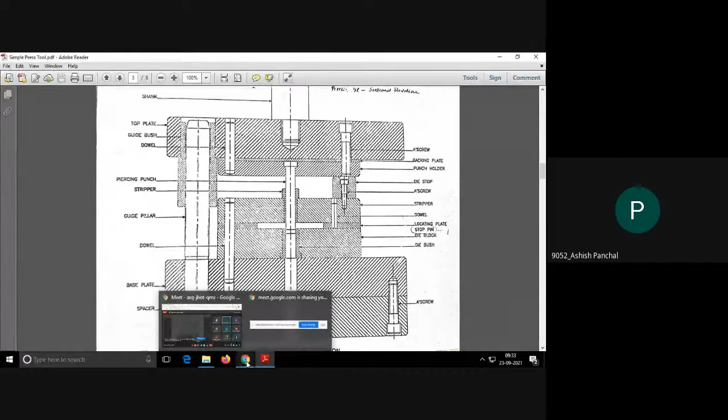Die block you take 25 mm thickness. Stripper you take 15 mm. Punch holder you can take 15 mm. This is just a rough guideline, okay, it's not hard and fast. And for the punch backing plate, 5 mm.

Then, coming to the bushes, how to design the bushes. You have to take minimum 3 mm and maximum 5 mm, not more than 5 mm, not less than 3 mm, because if the thickness of this bush is less than 3 mm, then it can collapse while fitting as well as during working. So minimum 3 mm wall thickness has to be there.

So for example, if piercing punch diameter is 10, then this diameter of the guide bush will be 16 minimum and maximum 20. Similarly, collar also you can take 3 mm to 5 mm. So if this is 10, this diameter maximum will be 20 and this diameter maximum will be 30. Then collar height thickness, you can have your own judgment. You can take 5 mm.

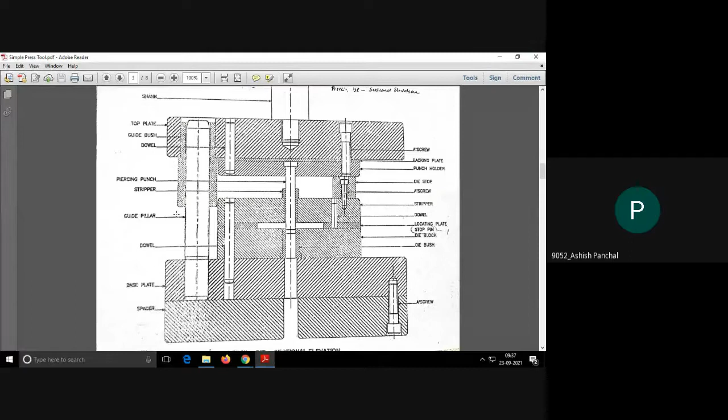Now this is a straight pillar, uniform diameter. You can have a collar here also for the guide pillar. That is a good design. Okay, so that collar you can keep. Now suppose if you take this as 16 mm, this collar you can take 5 mm plus 5 mm, so 10 mm more. Or if you are taking this as 20, then the collar can be taken as 30 mm, and the thickness of the collar can be taken as 5 mm.

Now similarly here also, this length I told you 30 mm, but you can keep even 5 mm, and you can tighten it with the help of the bolt. Now here this bush is not tightened or fixed to the top plate. So during working, maybe after 1000 or 10,000 strokes, there may be possibility that this bush will fall down. Even though it is tight fit, because the tool is working and the guide pillar is going in and out, this guide bush may fall down. So it is a good practice to provide at least two bolts.

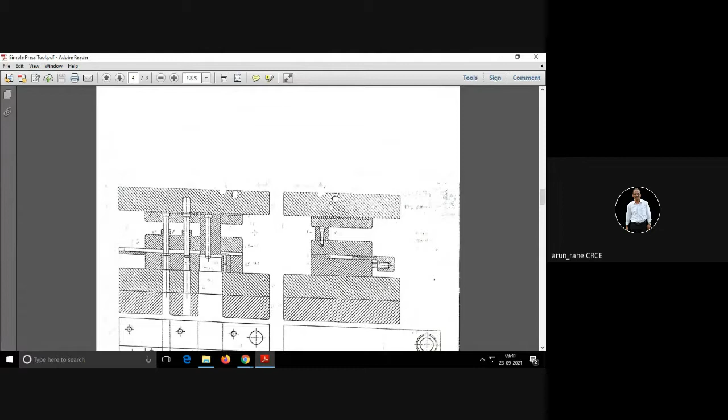Okay. Then another consideration here is this is a die stopper. Ye jo hai usko hum log die stopper bolte hain, or die stop. This is used just to prevent the falling of the upper half. Suppose in case it comes out of the shank, so if it falls down and, imagine, if this die stop is not there, then this punch holder will go and hit here and your punch holder plate will get damaged. So that's why we provide a die stop.

Now look, the die stop is fixed to the stripper plate. See the bolting. Die stops are round, circular. See here, these are the die stops. Ye jo dikh raha hai do, these are the die stops. Okay. So preferably the die stop should be at the center of the die, somewhere here, not at the end. Die stop should be preferably at the center or somewhere closer to the center.

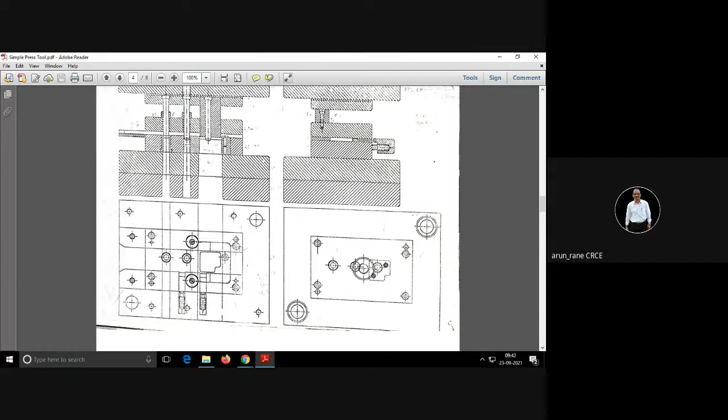So look here, the die stop is fixed to the stripper plate. So in case the upper half falls down, it will go and touch the die stop, so the damage will not happen. Die stop size: you can go for a round die stop of 25 diameter, and the height of the die stop can be taken as 20 mm. So ye die stop ho gaya. So I have told you die stop, shank, top plate, guide pillar, guide bush, dowel, everything. These are the basic parts.

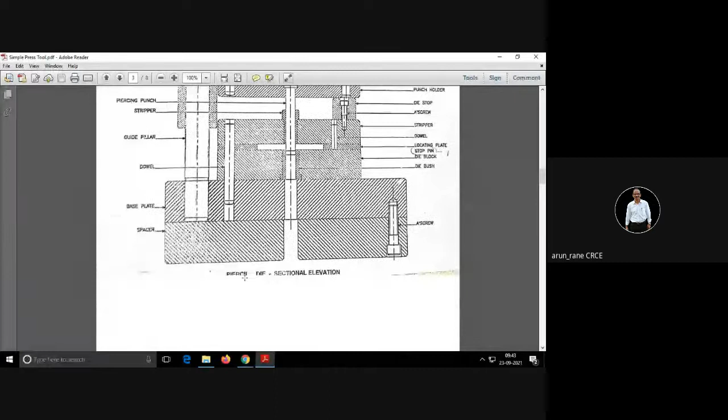Now either you can use a spacer, that is a parallel block here, or you can use a plate of the base plate size, and thickness can be 25 mm. If you are using spacers, then you need to use two spacers. Why are spacers used? Just to save on material. Suppose this is 300 by 250, then for the spacer you need not go for 300. You can use a spacer of say 100 mm by 250, two numbers. But if you are using a single plate, then alignment issues will not occur.

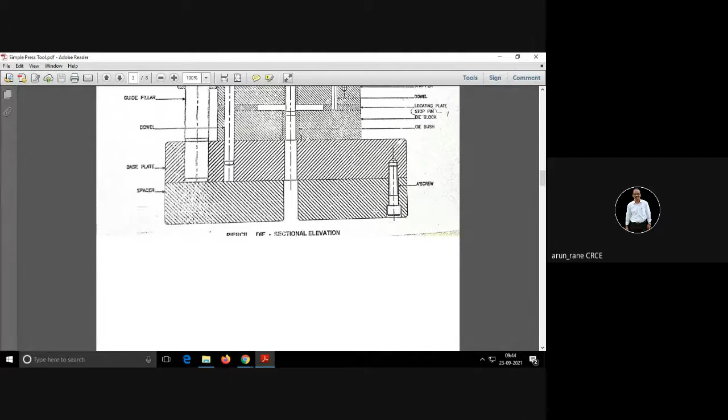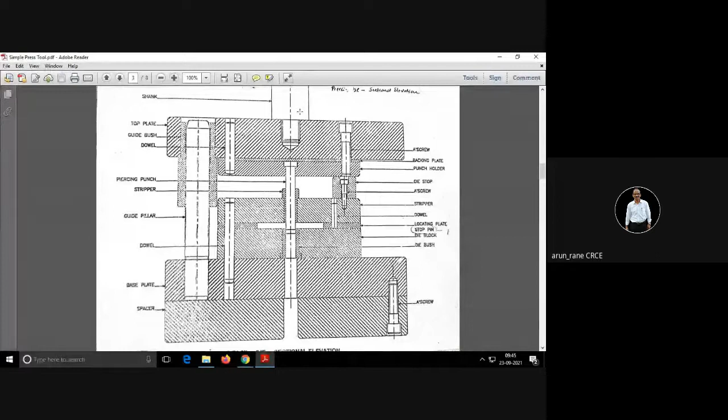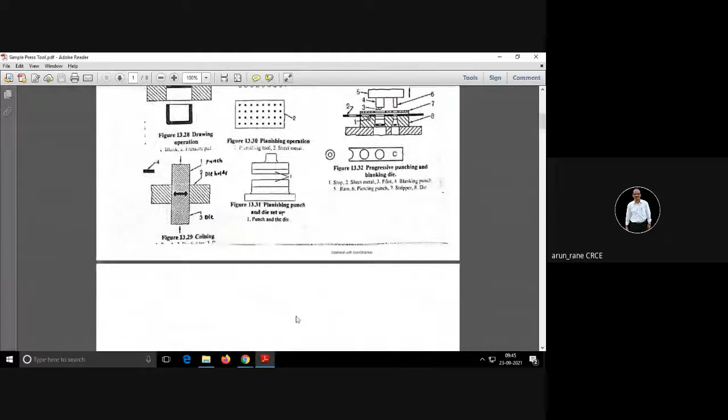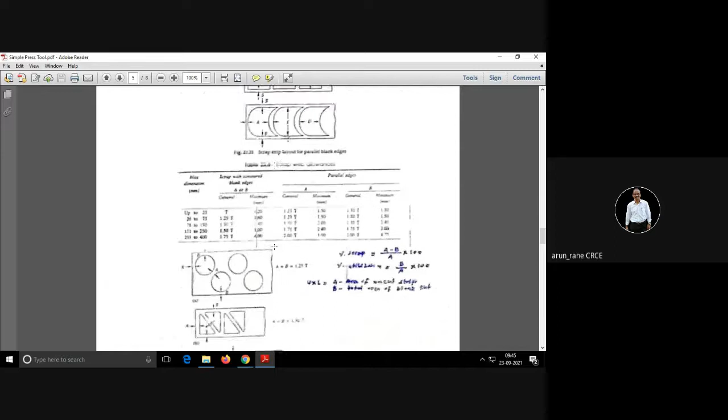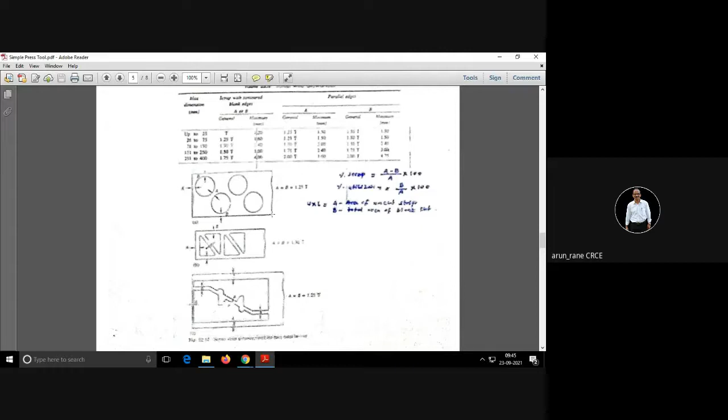Then other things I have covered, so this will help you for the strip layout, how to do the strip layout. This is again one of the components. This is for the circle. Yesterday Joel was telling that in case of a circle, the percentage utilization will be less. But if you have a layout like this, then probably your percentage utilization can be improved. Now here, what is happening? This is actually a stamping used in motors. Now isme kya hai?

This is a blank. I had explained this, again I will explain. Isme aise 6 punchings hain plus center mein hai. Now if you try to do everything at one station, the punches are going to come very close, so it is definitely going to break. Practically it will not be possible. So it is advisable that you first do piercing, then piercing of these 3 so that there is enough space here. Then at the third station you do this, and at the fourth station you do the blank. In this case the disadvantage is the tool length will increase because you are doing it at 4 stations.

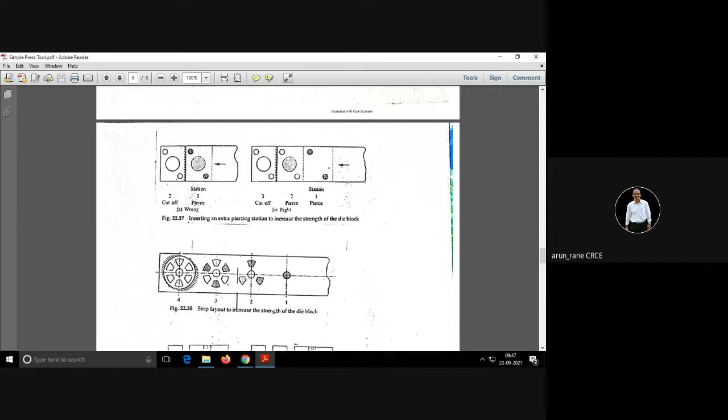If you are trying to do it at 1 station or 2 station, that tool will not work. Practically it is impossible, because how many punches do you need? 1, 2, 3, 4, 5, 6 plus this 7, and for that you will have a punch for the blank too. It will not be possible to accommodate 7 punches at one station. There will be very less wall thickness, and this tool will not work practically. Within just 50 strokes something or the other will break. So that's why you have to convert it into 4 stations.

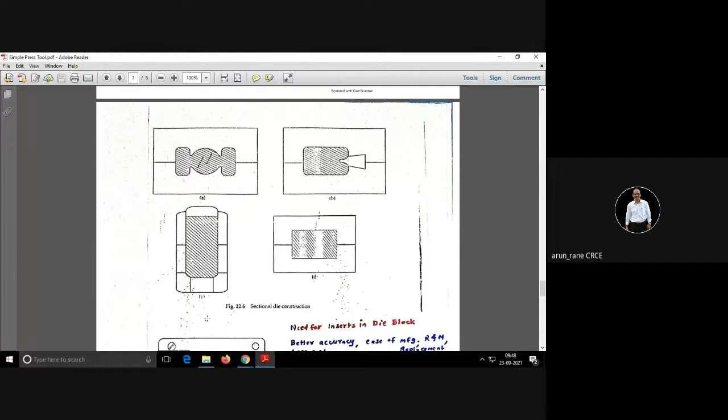Similarly, this is again a strip layout for making a circlip. And this is the concept that instead of going for a single piece, single plate, you try to go for inserts. Like I told you, for the punch which is working, you use bushes. Don't directly pass the punch in the plates itself, in the die block. So in the die block you fix a bush, and in that bush the punch will go up and down. Similarly, that punch is also going to be fixed in the punch holder plate with the help of a bush. So try to use bushes or inserts wherever there is relative movement.

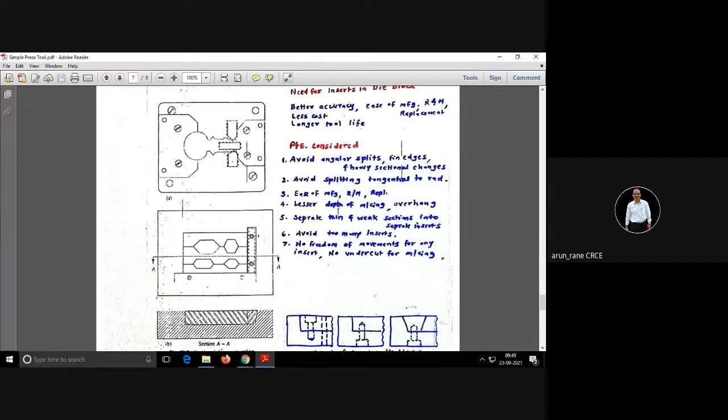So now this was a key. The inserts will also help you from a machining point of view, it will be easier to machine. These are the ways to fix the inserts, and these are the standard die sets. I have explained this too, and these are the stops. These are the stops because you have to initially locate the strip. The strip has to stop at some point, so for that you are using these end stops.

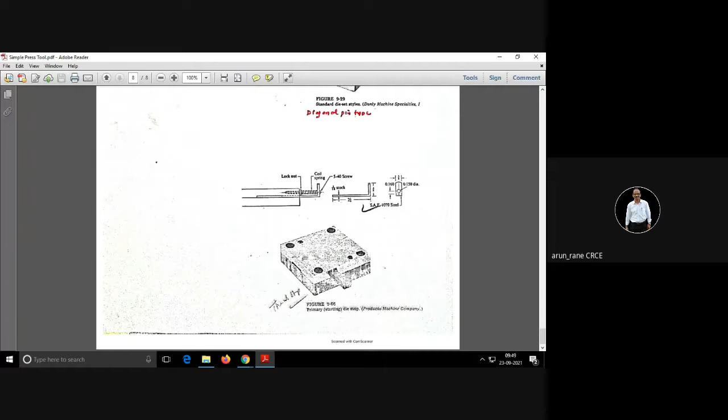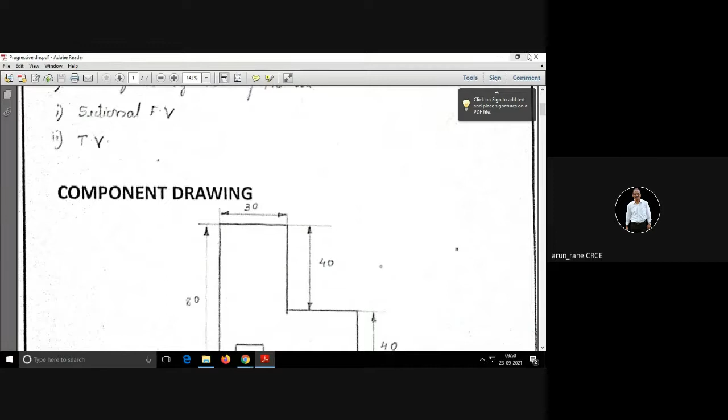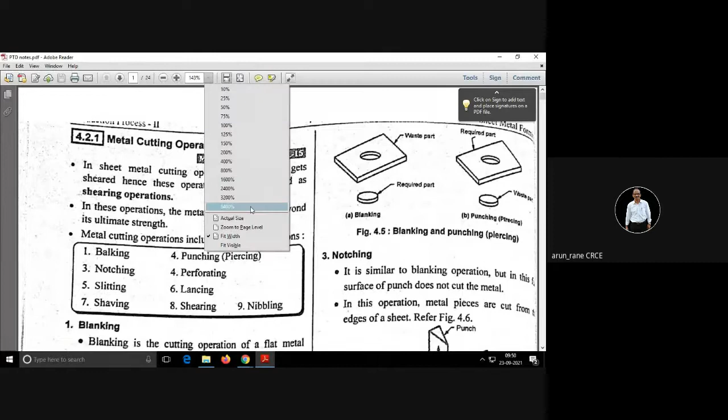So this is also done. Now I had skipped some part, and to keep you engaged, since we had almost finished with process estimations and process time estimation, I had started with the progressive die design. I feel I have taught you enough so you can start with your progressive die, and definitely we'll discuss it in the practical. So I had missed some parts, like what are the different operations. Before we go for bending and drawing, I would like to touch upon some important points. Can anybody tell me what is the difference between slitting and lancing?

Slitting - this I am telling you from my teaching experience, not from the notes. So if you want, you can write it or refer to the recorded lecture. Slitting is nothing but cutting, and in that the scrap will be generated. So you can write: in slitting, scrap is generated. Whereas in lancing, on the other hand, scrap is not generated. So this is what slitting is, and this is lancing.

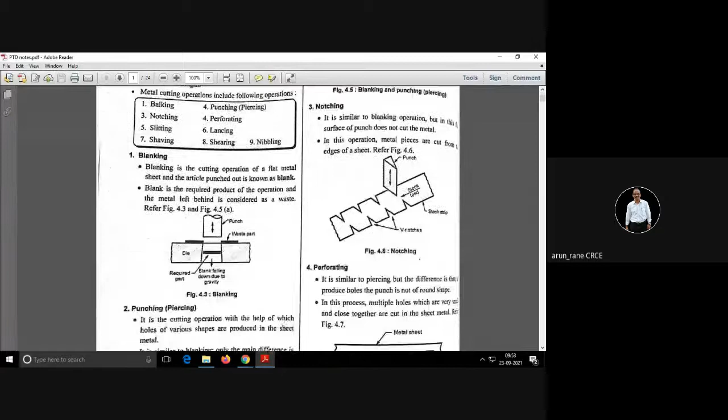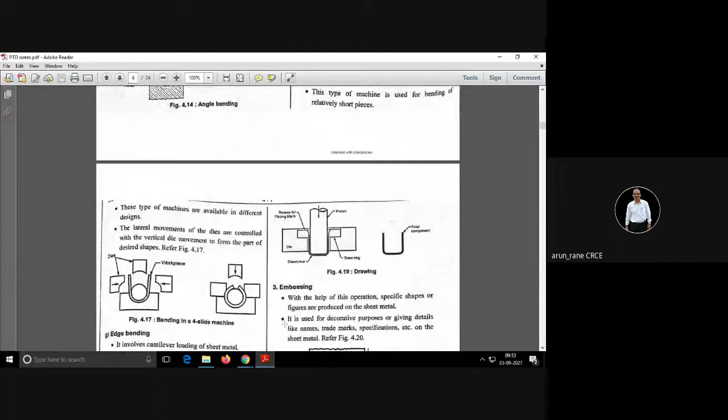Then coining and embossing. So coining and embossing are actually not cutting operations, they are forming operations. Let me show the sketches - this is a sketch of embossing, and this is the sketch of coining.

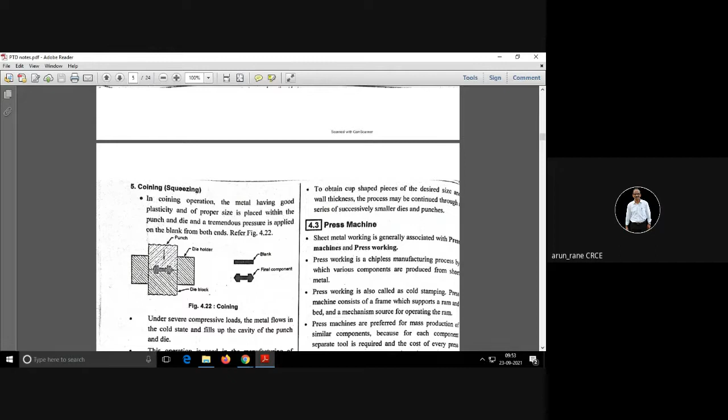So what happens in coining - you can have two different designs on both sides of the workpiece. It is like casting or molding, whereas in embossing you cannot have that. In embossing, we press the material down, and the material bulges out on one side. Whereas in coining you can have two different designs, like head and tail. So in coining there will be two different designs, and in embossing there will be only one design on one side, because in embossing one side is depressed and the other side is raised, like on a belt, a waist belt, whereas in coining the different design is created on both sides.

In coining, there will be a change in the thickness of the strip, whereas in embossing, there will not be a change in the thickness of the strip. If this is your 2mm strip, it will remain 2mm.

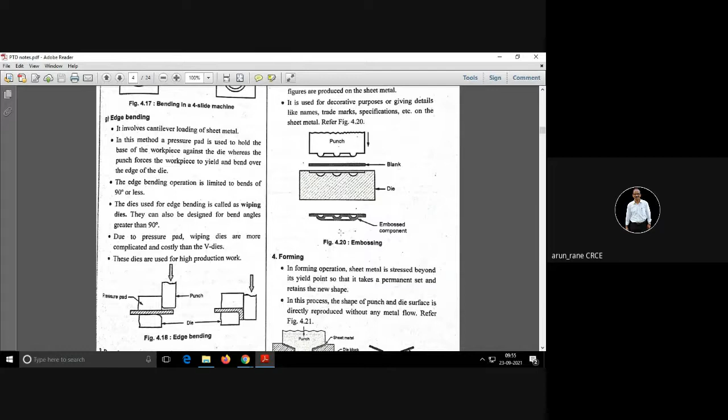Only it bulges out. Whereas here, this is a blank, and you will get a variation in the thickness. The blank's thickness and the final component's thickness will be different.

I hope you are understanding. If you are not understanding, please stop. I am only giving you 2 or 3 points out of my teaching experience. Blanking and punching - this is most commonly the difference that is asked.

So you know, in blanking, the punched out piece is useful and the remaining is scrap. In punching, the punched out piece is scrap and the remaining is useful.

Then in blanking, the clearance is provided on the punch and the cavity is of the size of the blank. If I want a blank diameter of 25, then my die block's cavity will be of 25, and the punch will be undersized at 24.8 depending upon the clearance, and it's the opposite in case of punching.

So in punching, the punch is of the same size as the hole to be pierced, and in blanking, the cavity is of the same size as the component diameter.

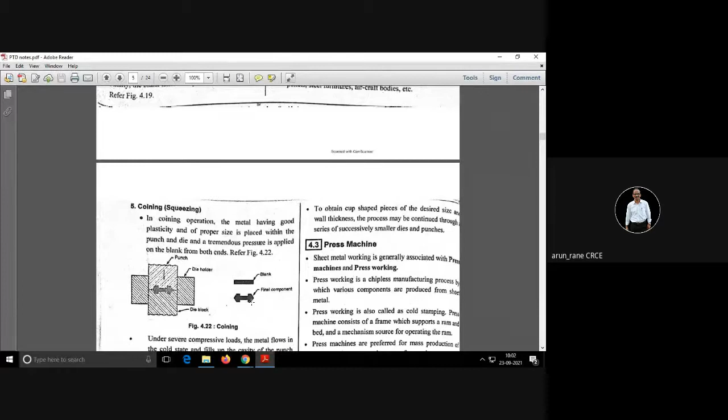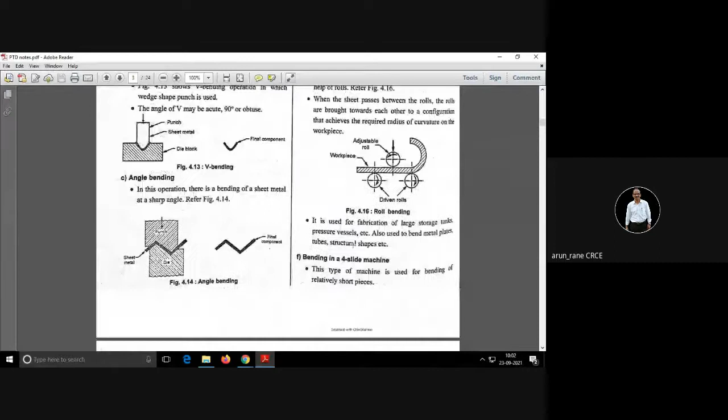Then bending and drawing we'll see later. Okay, now we'll quickly flip through this. These notes I have already uploaded, because with the help of this you will be able to write for the examination. So this is blanking - what is happening here?

The bottom part which is falling down due to gravity, that is what we are going to use. So that is what is blanking.

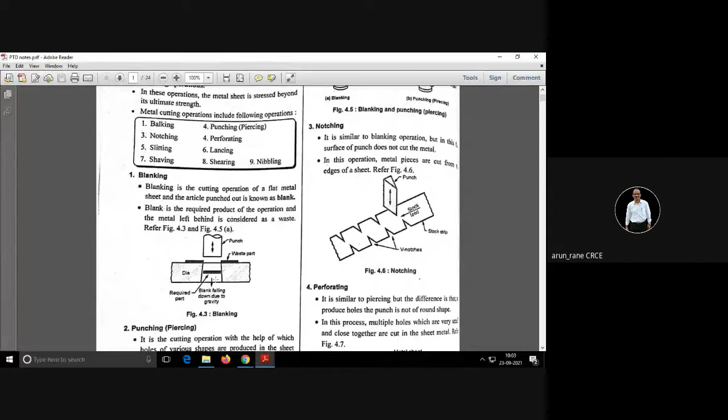Punching - this is the part which is going to be used, and this is the scrap. In blanking, this is the scrap, the top one, and the bottom one is used.

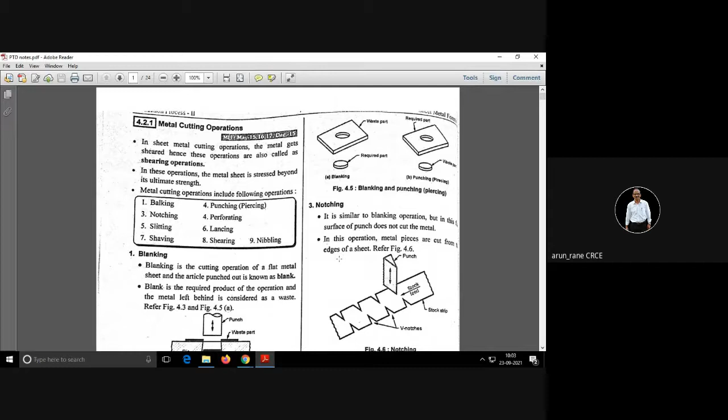Notching is also like a piercing, but usually notching is always at the edges. So we call it a notch, we don't call it a piercing. It is always at the edges.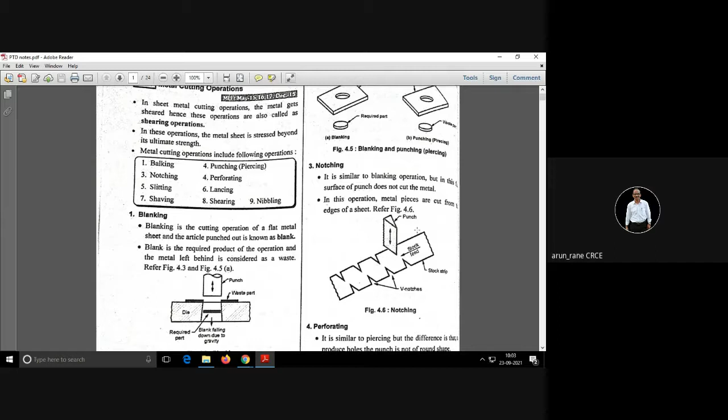This is perforating. It can be square holes or round holes, a number of holes. Not necessarily that it's square or round - it can be triangular, small triangles which are pierced. That is what is called perforating.

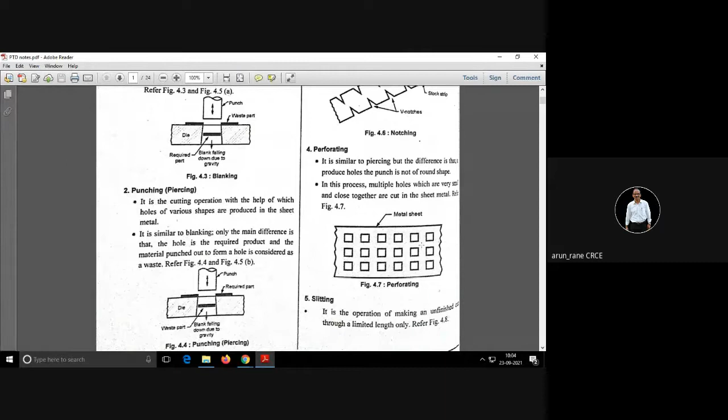Slitting, as I told you, you will get a cut here, and lancing - there will not be any scrap. Three sides will be cut and one side will be bent. So you can notice in this sketch that this clearance is more. This is a die block in which this we call a cavity, and this is a punch which is descending down. Now this clearance you can note is equal to the thickness of the component.

Then shaving and trimming are the same. In shaving and trimming, a very small amount of material is removed.

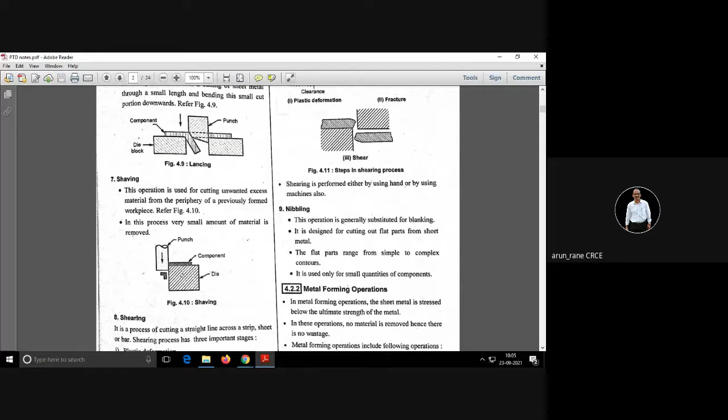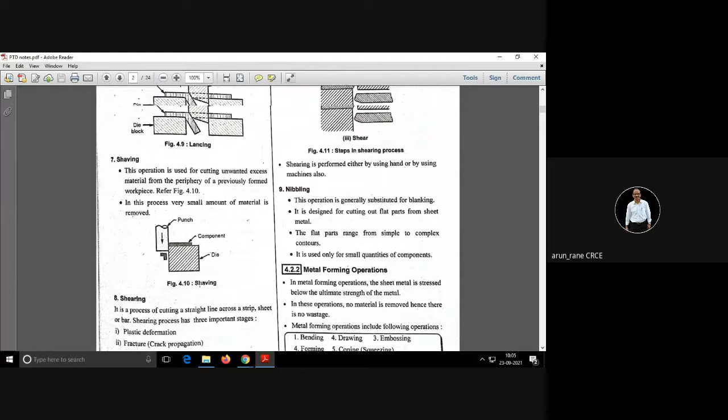Shearing is nothing but cutting basically. And as I told how the shearing operation takes place, you have a punch. Remember here the clearance is not more. It looks like it is more, but it is zoomed up just to show how the shear or the cutting happens.

First is plastic deformation - the workpiece is plastically deformed. Then the fracture starts from the punch part and from the cavity part, and the fracture meets, and only then will this piece fall down. If this fracture doesn't meet, like suppose here you have 30 degrees and here you have 45 degrees, if these are not meeting, then cutting will not happen, shear will not happen.

It is like if you are drilling from both sides like a tunnel, and if they are off, they will not meet. Or if you are doing a long drilling, say you need to drill 1000 mm, so 500 mm from side A and 500 mm from the other side - if they are not matching properly, you will not get a 1 meter hole. So the same thing here, both angles should be correct.

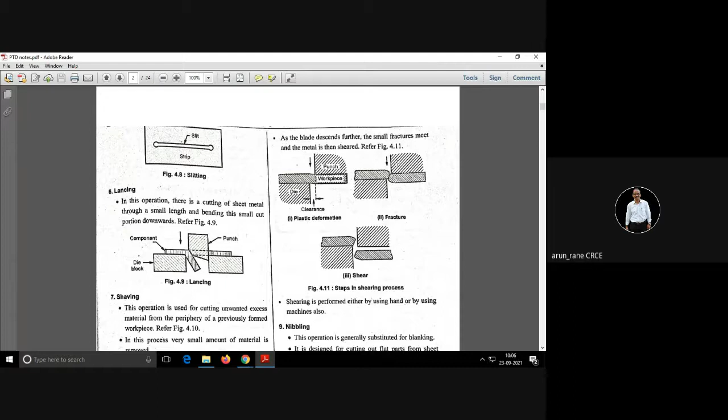Nibbling means what? Like suppose if I want to do a punching of a bigger hole, say I want a punching of 200 dia, my piercing hole size is 200 dia. In that case, I need a punch of diameter 200. So what we do to save on material cost and manufacturing cost is use a smaller punch, say 10 dia, and then do the punching across the hole.

So we'll take a series of strokes - tap, tap, tap, tap, tap. That is what is called nibbling across the hole.

So we are going to use a small punch which is readily available. The disadvantage of this is that it takes a longer time. And the advantage is you don't have to go for a diameter 200 punch.

And it's not necessary that you can only do round holes - you can even do square holes. Only that it will take a lot of time.

And second thing is, this nibbling has to be performed on a CNC punch press, where there is a provision for moving axis X and Y. Remember, nibbling is like your milling machine - only in a milling machine the end mill is rotating while X and Y axis move. In nibbling, the punch is moving up and down, it's not rotating, and there is movement for X and Y axis.

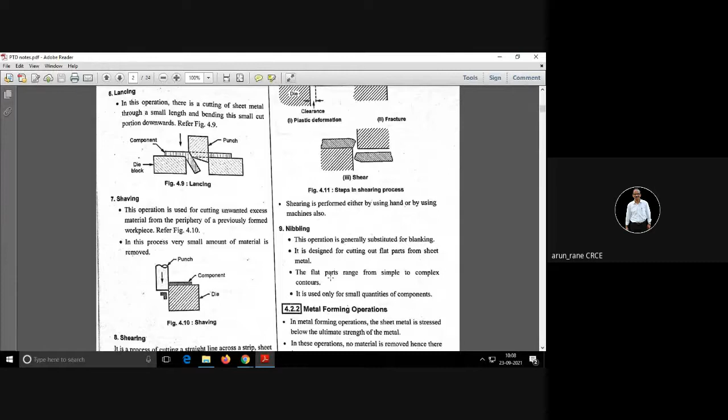So what's the difference between nibbling and milling? In nibbling, the punch is moving up and down. In milling, the milling cutter is rotating.

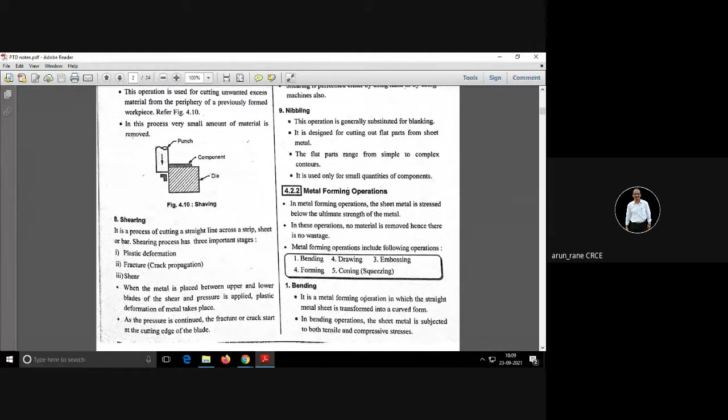And now what about forming operation? Here the cutting doesn't happen. So remember, in forming the clearance will be more. So what are the various forming operations? Bending, drawing, embossing, forming itself - forming is a type of forming operation. Coining.

So in case of cutting, the sheet metal or the strip is stressed above the ultimate strength of the material.

Whereas in metal forming, the sheet metal is stressed below the ultimate strength, and there is no cutting, no material removal. In metal forming, remember, bending, drawing - there is no metal removed, material is not removed. So there is no wastage.

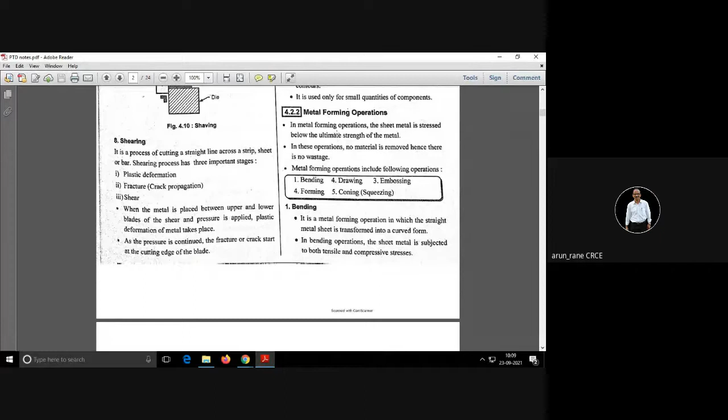And these are the various metal forming operations. Like U bending - is there any cutting? No. Is there any wastage? No.